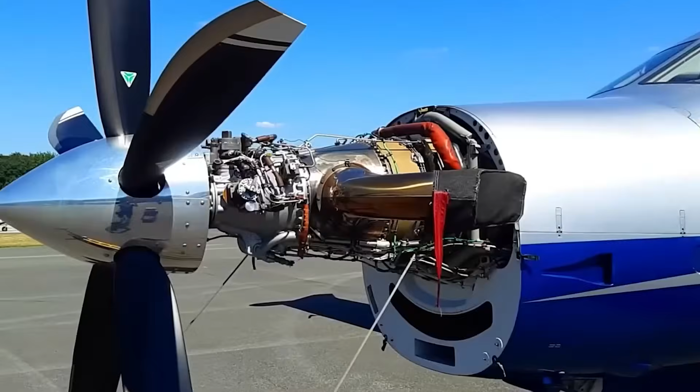Below you, piston-powered aircraft labor at lower altitudes, their engines hammering away with mechanical brutality, pistons slamming up and down hundreds of times per minute. This isn't science fiction, it's the promise that turboprop technology has tantalized us with for decades, and recent breakthroughs suggest it might finally become accessible to general aviation.

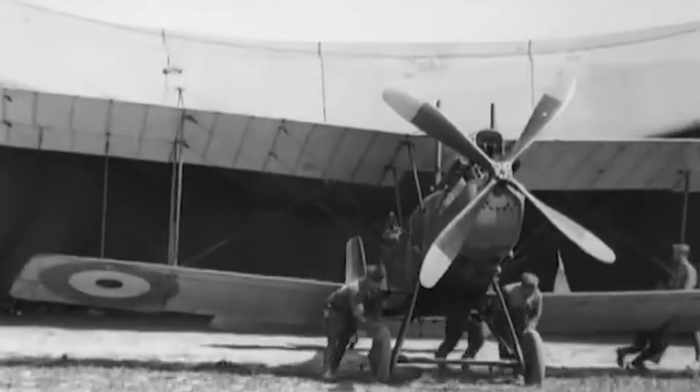The revolution at 20,000 feet. For over a century, piston engines have dominated light aircraft like an unshakable institution. They've powered everything from Cessna trainers to warbird legends, their familiar rhythm becoming synonymous with flight itself. But that dominance faces its first real challenge.

In specialized applications worldwide, a new sound is emerging. The turbine's whistle, once reserved for jets and airliners, now spinning propellers on smaller aircraft, with breakthrough technologies promising to solve the efficiency problems that have kept them from mainstream adoption.

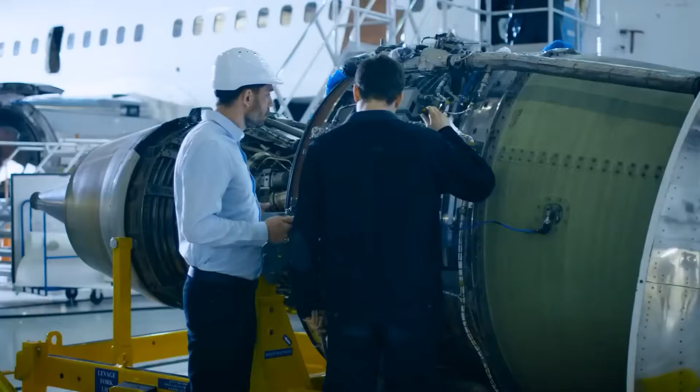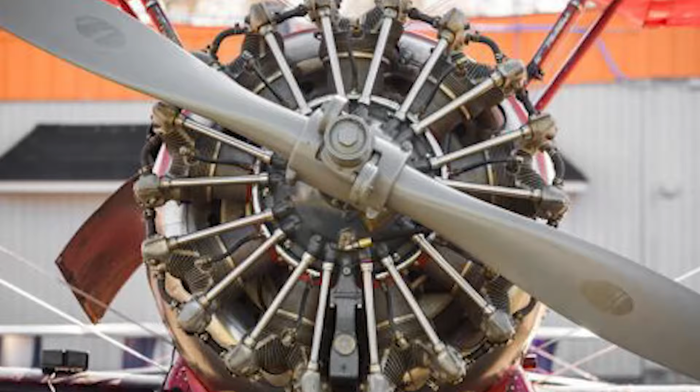The reliability numbers tell a compelling story. The Pratt & Whitney PT6A turboprop achieves time between overhauls of 3,600 hours standard, extending to 6,000 hours on some variants, compared to the typical 2,000 hours for piston engines. These turboprops routinely operate for thousands of hours with minimal unscheduled maintenance. Meanwhile, piston engine owners face regular cylinder work, magneto replacements, and exhaust repairs as routine operating expenses.

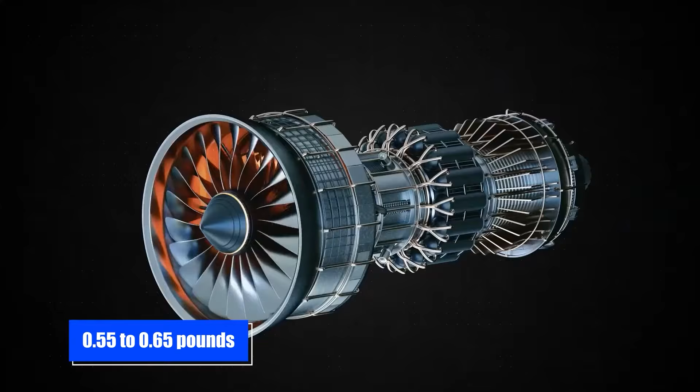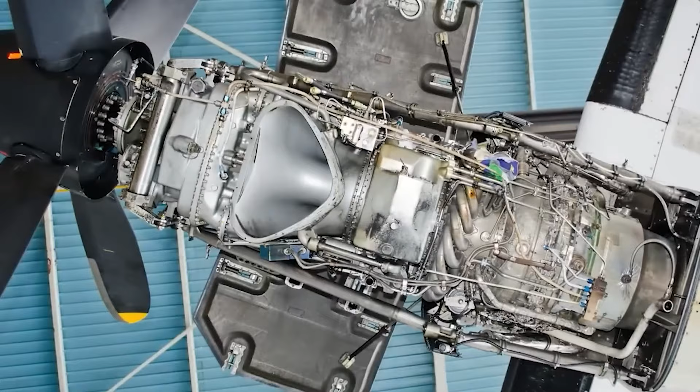But here's the catch that's kept turboprops from conquering general aviation: fuel consumption. Traditional small turboprops burn 0.55 to 0.65 pounds of fuel per horsepower hour, while modern piston engines achieve 0.42 to 0.45, with some diesel variants reaching an impressive 0.36. This efficiency gap has been the fortress wall protecting piston dominance.

Until now. The empire under pressure. For 8 decades, Lycoming and Continental ruled general aviation with engines that traced their lineage to the 1930s. These horizontally opposed power plants became the backbone of civilian flying, reliable enough, powerful enough, and most importantly, affordable enough for average pilots. The O-320, O-360, and O-540 series engines powered millions of flight hours, their designs refined but fundamentally unchanged since Eisenhower was president.

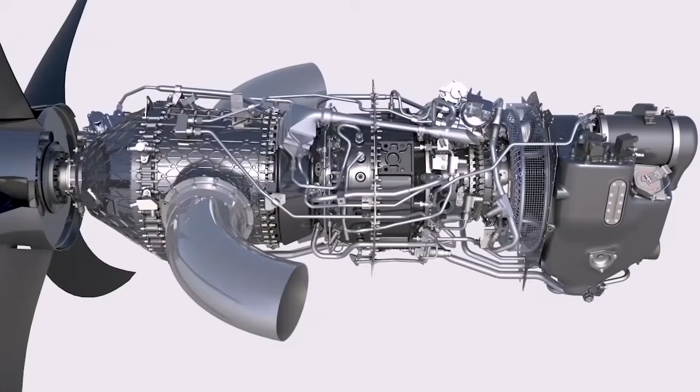The first cracks in this empire appeared with environmental concerns over leaded aviation gasoline. While cars abandoned lead in the 1970s, aircraft engines clung to 100LL low-lead avgas, still containing 2.12 grams of lead per gallon. Environmental agencies worldwide began pressing for alternatives, but the installed base of engines requiring high-octane leaded fuel seemed immovable.

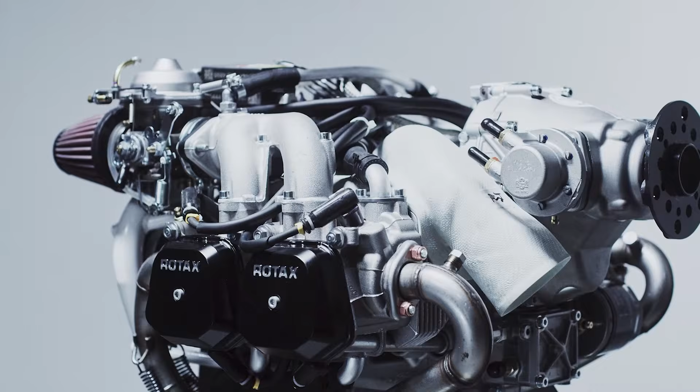Then Rotax arrived. From Austria with a different philosophy, their 912 series engines, derived from motorcycle technology, brought liquid cooling, gear reduction, and electronic ignition to aircraft. Burning regular automotive gasoline, these engines achieved better fuel economy than traditional aircraft engines while weighing significantly less. Suddenly, the old guard faced competition from outside their comfortable ecosystem.

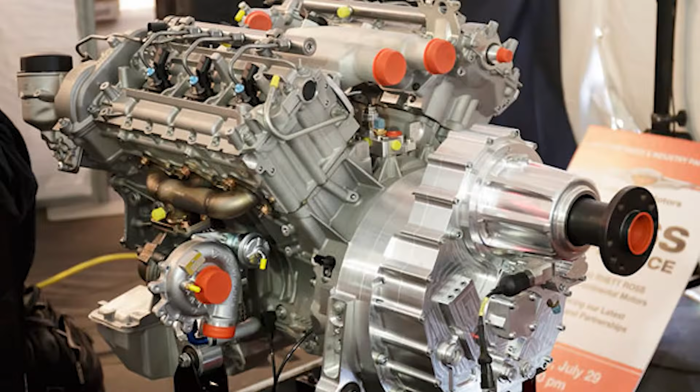The real disruption came from diesel technology. Continental's CD-100 series engines, based on Mercedes-Benz automotive designs, burn Jet A fuel while achieving specific fuel consumption around 0.36 pounds per horsepower hour, nearly 20% better than traditional avgas engines. Diamond Aircraft built entire model lines around these engines, proving that piston technology could evolve when pressed.

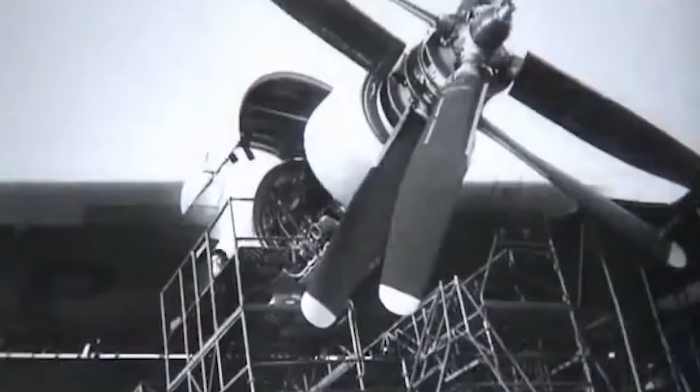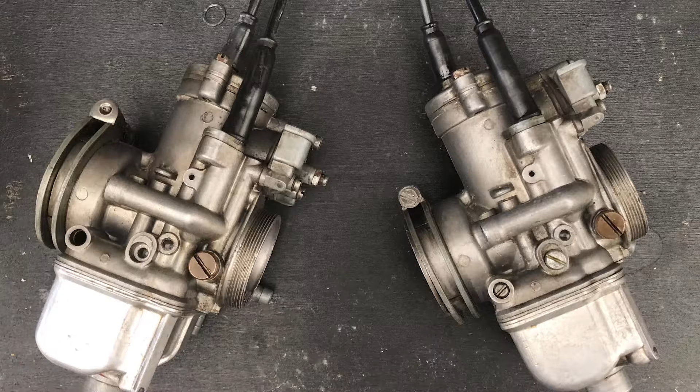Why small turbines struggled. Engineers have dreamed of scaling turbine technology down to light aircraft since the 1950s. The appeal was undeniable. Eliminate the reciprocating masses, the complex valve trains, the temperamental carburetors. Replace them with smooth rotation, simple architecture, and proven reliability. The physics, however, proved cruel to small turbines.

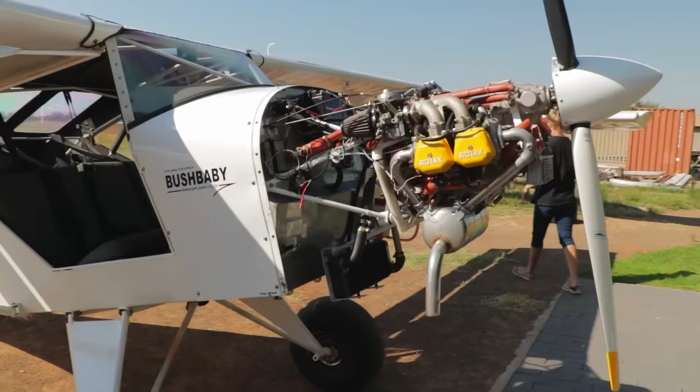As components shrink, the clearance between rotating blades and stationary housings remains nearly constant, meaning proportionally more compressed air escapes uselessly. A large turbine might lose 1% of compressed air to tip leakage. A small turbine might lose 5%. This geometric reality alone creates a massive efficiency penalty.

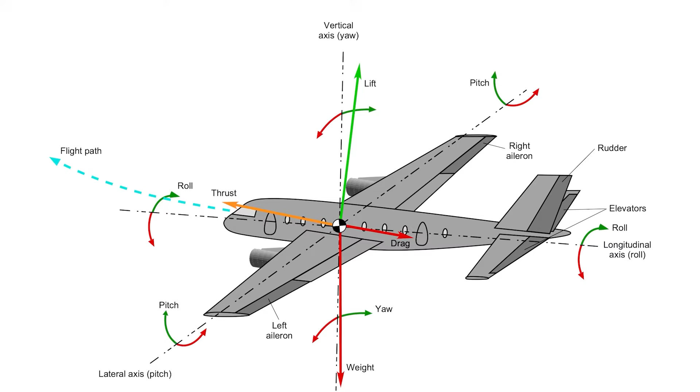The Reynolds number problem compounds the challenge. This dimensionless value describes the relationship between inertial and viscous forces in fluid flow. Smaller blades operate at lower Reynolds numbers, meaning the air behaves more like honey than water, dragging, swirling, creating losses at every turn. The same blade design that works brilliantly at airline scale becomes aerodynamically compromised at general aviation scale.

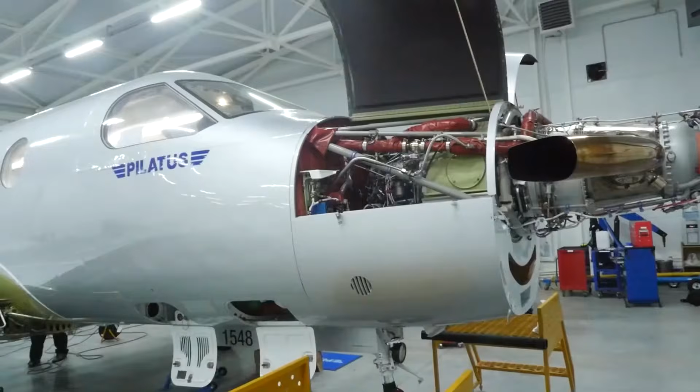Combustion efficiency suffers equally at small scale. Large turbines maintain stable combustion across wide operating ranges. Small combustors struggle with flame stability, especially at the partial power settings typical of cruise flight. While a piston engine might actually improve efficiency at reduced power, turboprops see dramatic specific fuel consumption increases when throttled back. For decades, these physics seemed insurmountable.

The Allison 250, now Rolls-Royce M250, found success in helicopters and specialized applications, but its fuel consumption made it impractical for most fixed-wing uses. The engine burned roughly 0.60 pounds per horsepower hour, 50% more than comparable piston engines.

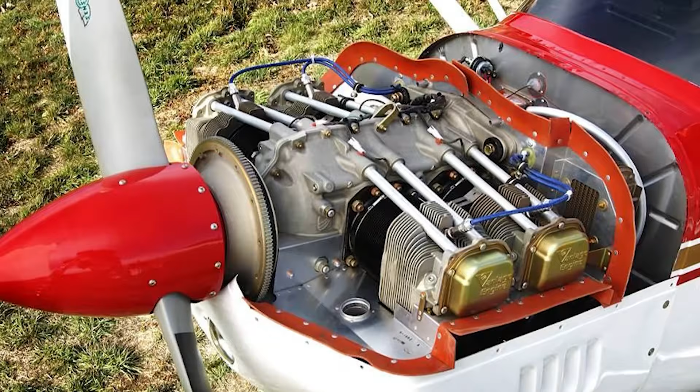The game-changing innovation. In a facility outside Paris, Turbotech achieved something the industry considered impossible: a small turboprop with near-piston fuel efficiency. Their TP-R90 engine claims specific fuel consumption of 0.45 pounds per horsepower hour, within striking distance of traditional aircraft engines, and better than many older designs.

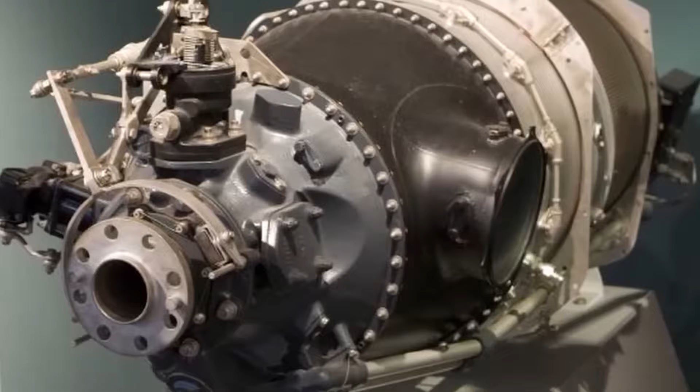The secret is recuperation, capturing waste heat from exhaust gases to preheat compressed air before combustion. Industrial gas turbines have used this technique since the 1960s, but aviation applications seemed impossible due to weight and complexity constraints.

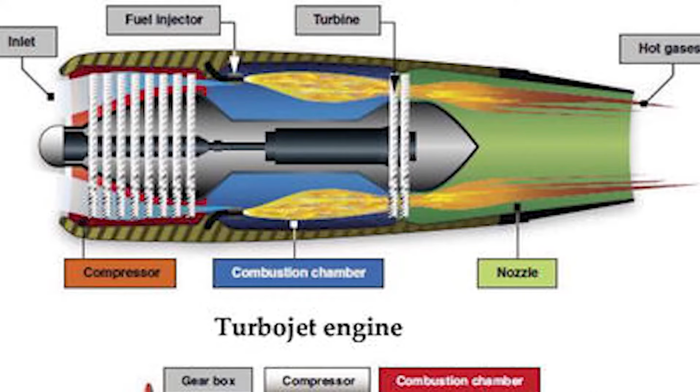A recuperator is essentially a heat exchanger operating in one of the most hostile environments imaginable: extreme temperatures, vibration, and the absolute necessity of reliability. Modern materials made the breakthrough possible. Inconel alloys, developed for aerospace applications, withstand the thermal cycling that would destroy conventional metals.

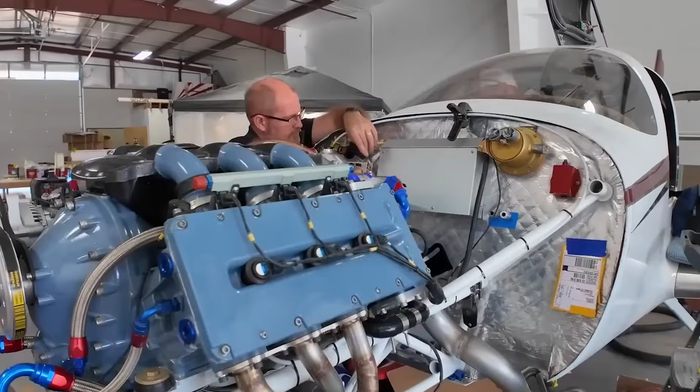Additive manufacturing enables geometries that maximize surface area while minimizing weight, folded passages that would be impossible to machine conventionally. Computer modeling optimizes every passage for maximum heat transfer with minimum pressure drop. The TP-R90 produces 130 horsepower from a package weighing just 78 kilograms, comparable to piston engines of similar power.

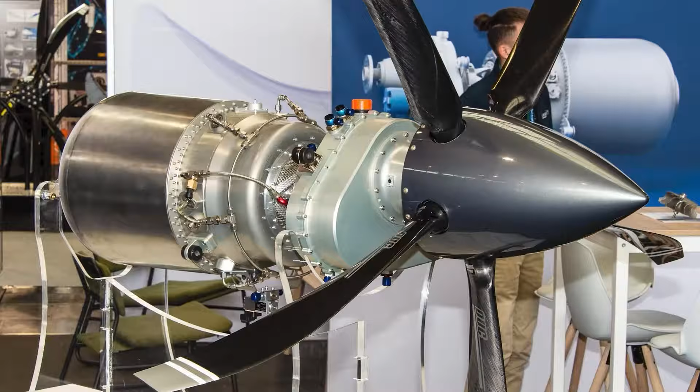It runs on Jet A, diesel, or even biofuels. Test pilots report turbine smoothness with fuel flows approaching their previous piston-powered aircraft. But this efficiency comes at a price, literally. Early estimates suggest the TP-R90 will cost approximately $100,000, roughly double a comparable piston engine. The hard mathematics of ownership.

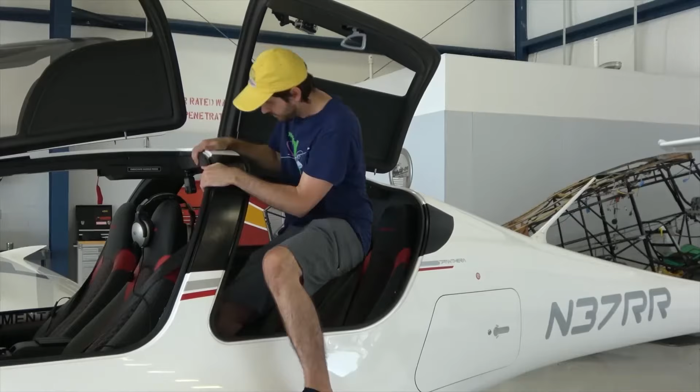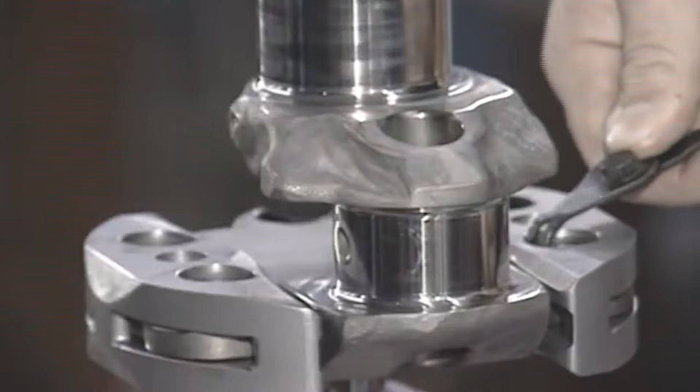Aircraft ownership economics extend far beyond purchase price. A typical Continental IO-360 costs around $45,000 new and requires overhaul at 2,000 hours for another $35,000. Between overhauls, expect cylinder work, magneto replacements, and exhaust repairs totaling $10,000 or more. That's $90,000 over 2,000 hours, $45 per flight hour just for the engine.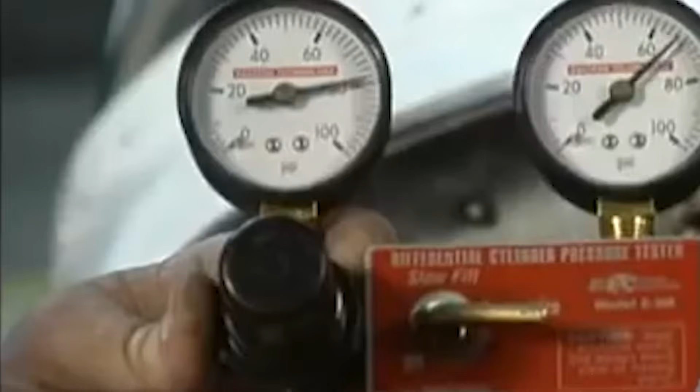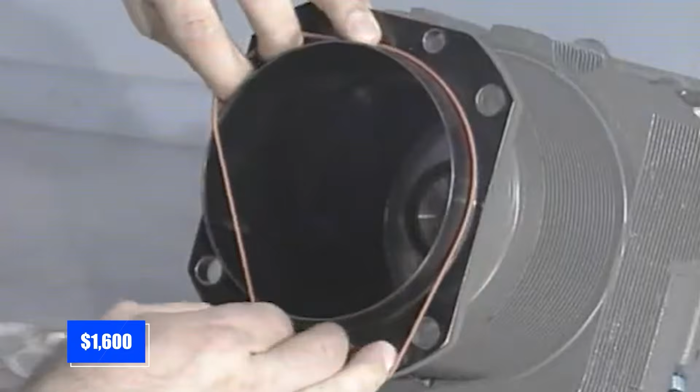But let's examine the hidden costs that make piston ownership even more expensive. Annual inspections on piston engines average $3,500, with compression checks, oil analysis, and borescope inspections adding another $1,200 yearly. Magneto 500-hour inspections run $800 each. That's $1,600 every 500 hours for the pair.

Spark plugs need replacement every 400 hours at $50 each, $600 for a 6-cylinder engine. Oil changes every 50 hours cost $200, including filter and analysis. Over 2,000 hours, these minor expenses add another $18,000 to your operating costs. Small turboprops promise different mathematics. While purchase prices currently run double or more than piston equivalents, the maintenance savings are dramatic.

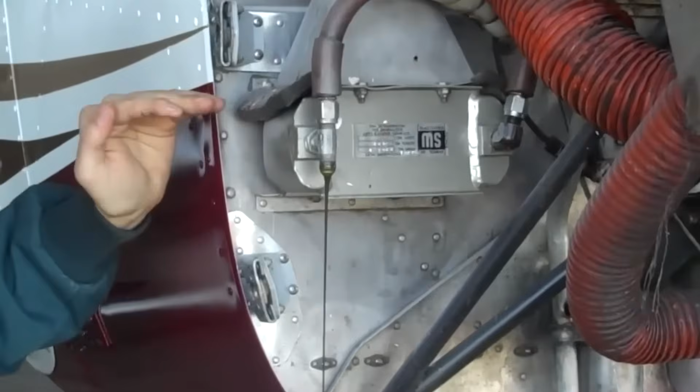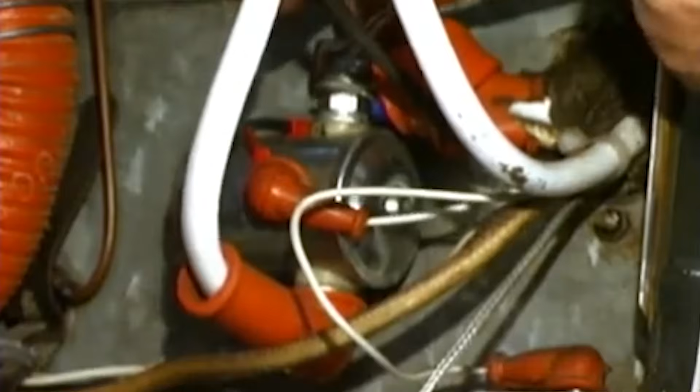Hot section inspections replace cylinder work. Electronic controls eliminate magneto problems. Single lever power management removes the possibility of detonation or shock cooling damage. Consider real-world operator data from a Canadian charter company that replaced their Continental-powered Cessna 206 with a Soloy turbine conversion.

Their piston engine was costing $89 per flight hour in maintenance and reserves. The turbine conversion, despite its $400,000 price tag, reduced that to $52 per hour. At 500 hours annually, they save $18,500 per year. The higher acquisition cost pays for itself through reliability. Their dispatch rate improved from 87% to 96%, meaning more revenue flights and fewer stranded passengers.

The altitude advantage multiplies these benefits. Turboprops maintain power as they climb, reaching their best efficiency at altitudes where piston engines struggle. At 18,000 feet, a turboprop might achieve its optimal fuel consumption while flying above most weather. A normally aspirated piston engine has lost 40% of its power and burns fuel inefficiently in the thin air.

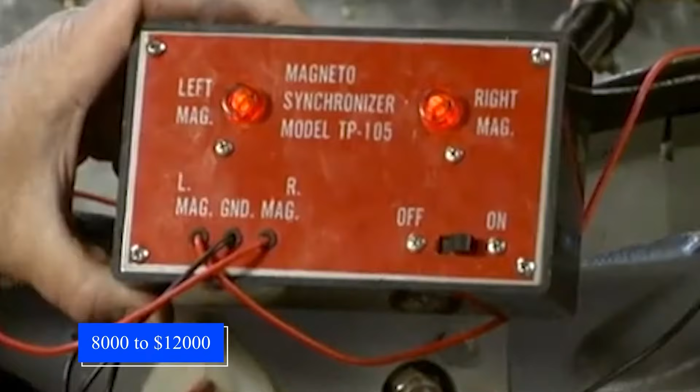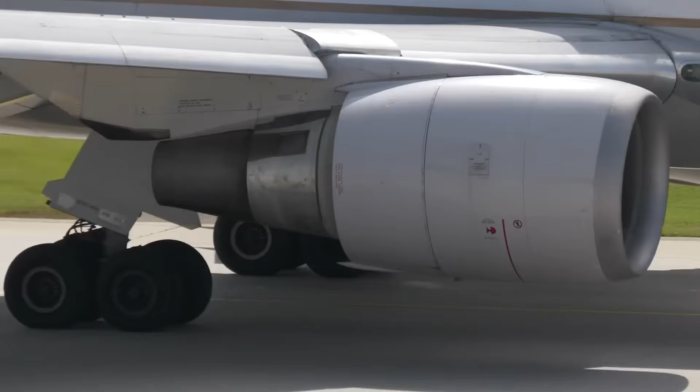Turbocharged piston engines can maintain power, but add another layer of complexity and failure modes. Turbocharger replacements run $8,000 to $12,000 and often fail before TBO. Insurance companies recognize the reliability difference. Turbine-powered aircraft often qualify for premium reductions of 15 to 25% compared to piston equivalents. For commercial operators, this alone can justify the higher acquisition cost.

A flight school operating a turbine-powered trainer reports annual insurance savings of $12,000 per aircraft compared to their previous piston fleet. The ability to dispatch reliably, especially in challenging conditions, translates directly to revenue. Weather cancellations drop by 30% when operators can climb above ice and turbulence, capabilities that piston aircraft struggle to match even with turbocharging. Two paths forward.

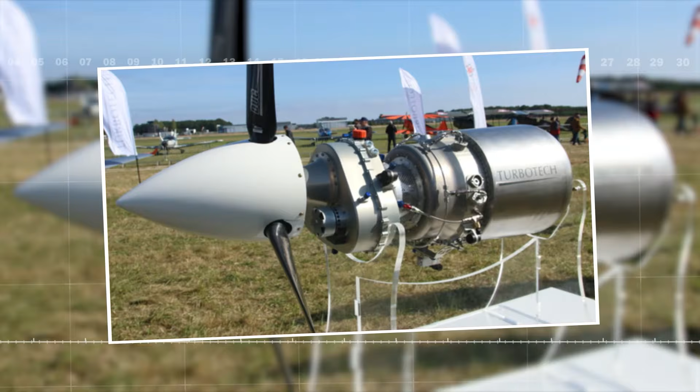The current market offers two distinct approaches to small turboprops, each with fundamental trade-offs. High-efficiency designs like Turbotech's recuperated engines achieve near-piston fuel consumption, but at premium prices and unproven long-term reliability. The recuperator adds complexity to what should be a simple engine, potentially negating the reliability advantage that makes turboprops attractive.

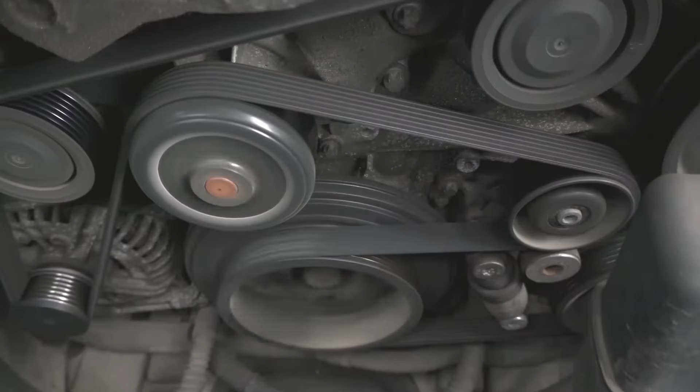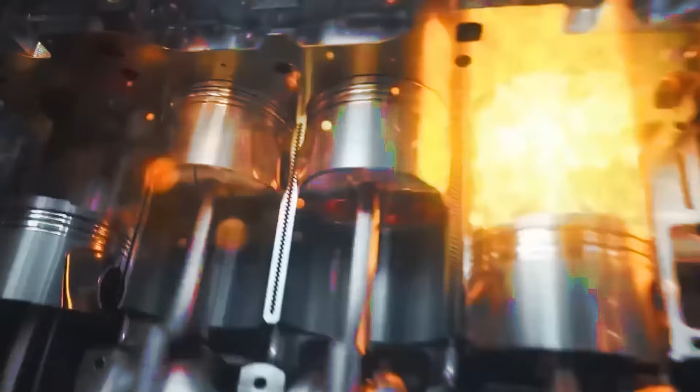The TPR-90's recuperator operates on a fascinating principle of thermodynamic recovery. The exhaust gas temperature leaving the turbine section reaches 650 degrees Celsius, energy that traditional turboprops waste entirely. The recuperator captures approximately 30% of this thermal energy, raising the compressed air temperature from 200 degrees Celsius to nearly 400 degrees Celsius before it enters the combustion chamber. This preheating means the engine needs 25% less fuel to achieve the same turbine inlet temperature.

But this efficiency comes with engineering challenges. The heat exchanger must withstand thermal cycling from minus 40 degrees Celsius cold starts to 650 degrees Celsius operating temperatures thousands of times without cracking, warping, or fouling.

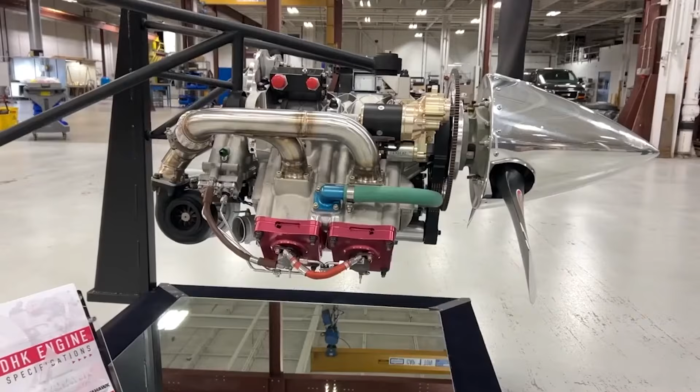The alternative path, pursued by companies like TurbAero and PBS Velká Bíteš, accepts higher fuel consumption in exchange for simplicity and lower cost. Their engines achieve 0.55 to 0.60 pounds per horsepower hour, about 30% worse than modern pistons, but with traditional turbine reliability and more accessible pricing around $60,000 to $70,000.

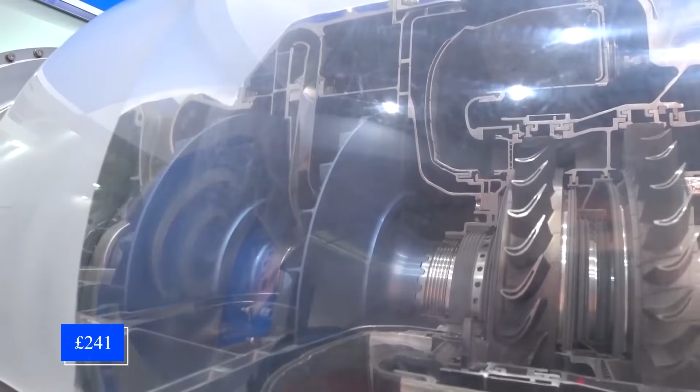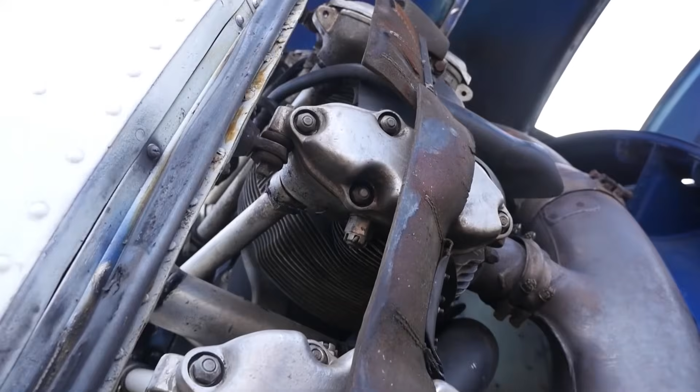The company has delivered over 1,000 units primarily to UAV manufacturers, accumulating millions of flight hours that prove the fundamental reliability. Their latest variant, the TP100S, adds a second-stage turbine that improves efficiency by 8% while adding only 15 pounds, still not matching piston efficiency, but closing the gap. This bifurcation creates distinct market segments.

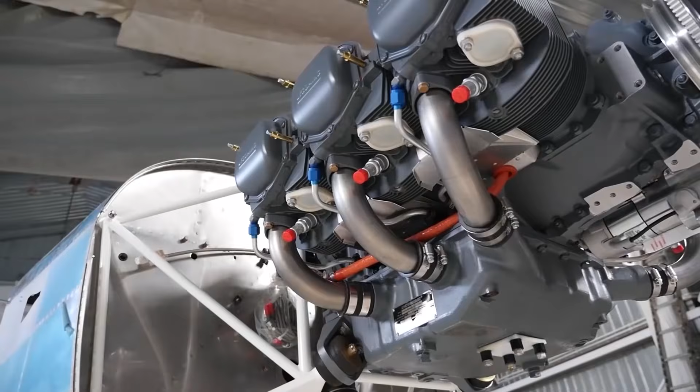Operators flying many hours annually might justify recuperated engines through fuel savings. Those flying less frequently might prefer simpler designs with higher fuel consumption but lower capital costs. Neither approach yet matches the overall economics of established piston engines for typical private owners flying 50 to 100 hours annually. The wildcard is ongoing development in ceramic materials and advanced manufacturing.

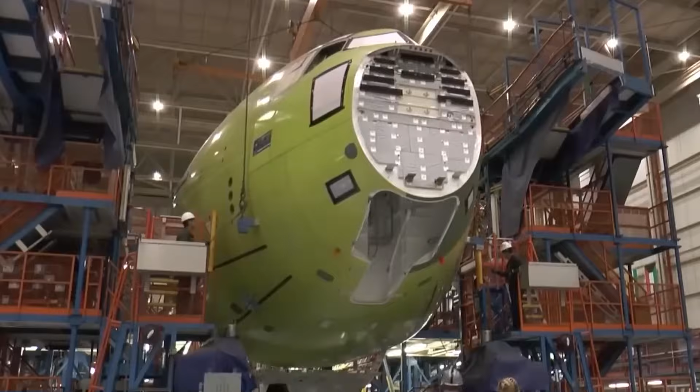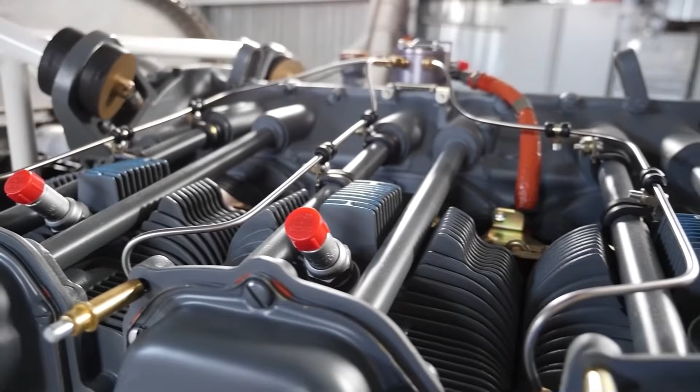NASA's Small Business Innovation Research Program recently funded 3 companies developing ceramic matrix composite recuperators that could operate at 750 degrees Celsius while weighing 40% less than metal equivalents. If these materials prove durable, recuperated engines could achieve 0.40 pounds per horsepower hour, better than most piston engines, while maintaining the weight advantages that make turboprops attractive for aircraft applications.

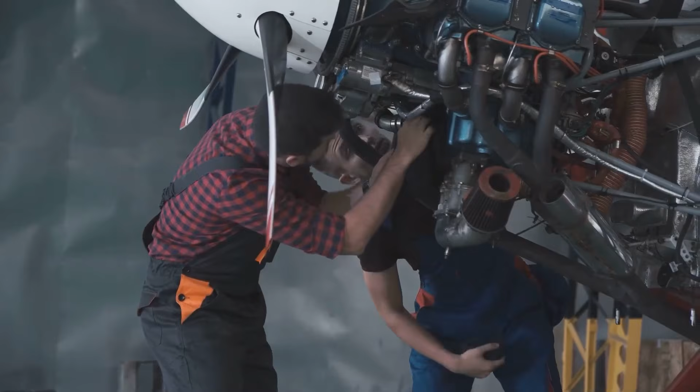The market response: traditional engine manufacturers aren't standing still. Lycoming has partnered with Cobra Aero to develop small turboprops for the unmanned aerial vehicle market, a testing ground for technologies that might migrate to manned aircraft. Continental, through its parent company AVIC, has access to Chinese turbine development that could yield surprising advances. But the most interesting developments come from outside traditional aviation.

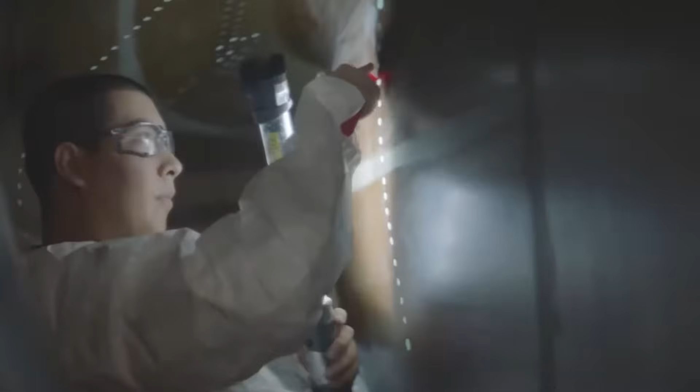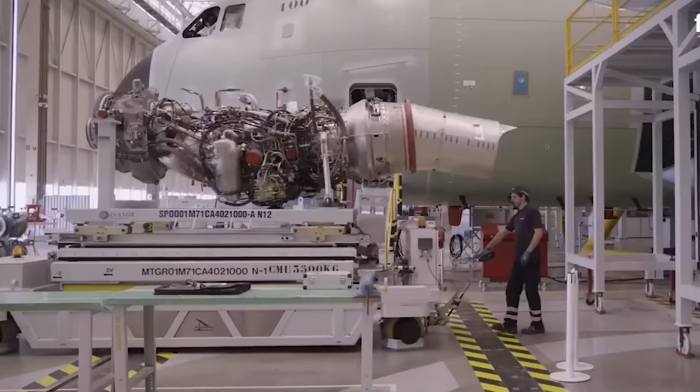Automotive suppliers, experienced with turbochargers and high-temperature materials from diesel development, see opportunities in aircraft propulsion. Electric vehicle companies view small turboprops as ideal range extenders for hybrid aircraft. A turbine running at constant, optimal speed charging batteries combines the energy density of liquid fuel with the efficiency and simplicity of electric propulsion. Several hybrid projects are already flying.

A modified Pipistrel Panthera uses a small turbo generator to extend the range of its electric propulsion system. The combination delivers near-silent takeoffs from noise-sensitive airports, then efficient cruise powered by the turbine. It's a glimpse of how turboprops might enter general aviation, not as direct replacements for piston engines, but as components in hybrid systems that leverage the best of multiple technologies.

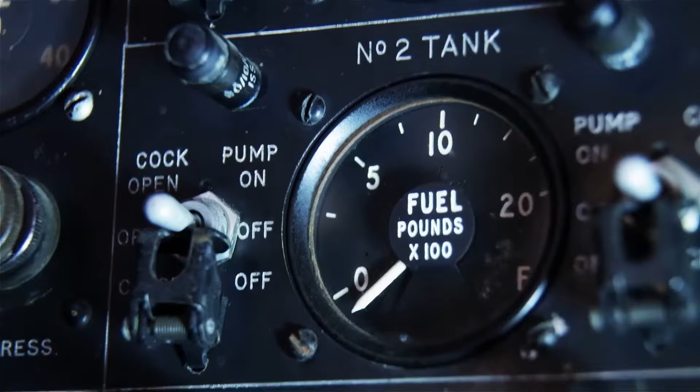Flight training organizations watch these developments carefully. The reduced pilot workload of turboprops, single-lever power control, no mixture management, no shock cooling concerns, could improve safety while reducing training complexity, but the higher operating costs remain a barrier. Until turboprops achieve true fuel consumption parity with piston engines, most schools will stick with traditional power plants.

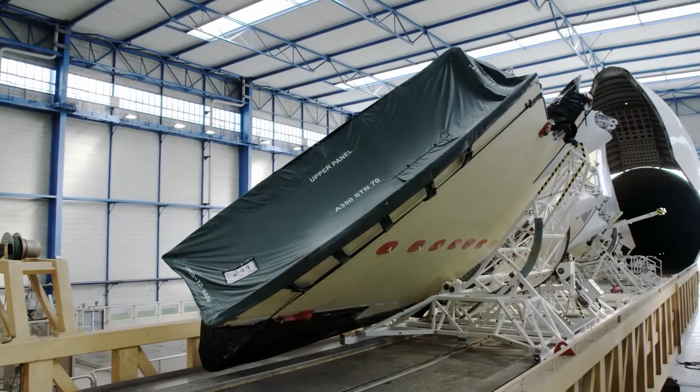Manufacturing revolution. The transformation in turboprop viability stems largely from manufacturing advances that seemed impossible a decade ago. Metal 3D printing enables internal cooling channels following optimal thermodynamic paths rather than manufacturing convenience. Components that once required dozens of parts brazed together now emerge as single pieces from powder bed fusion machines. This changes everything about engine development.

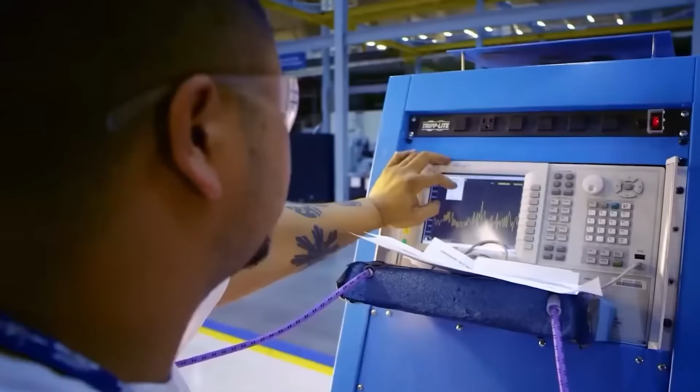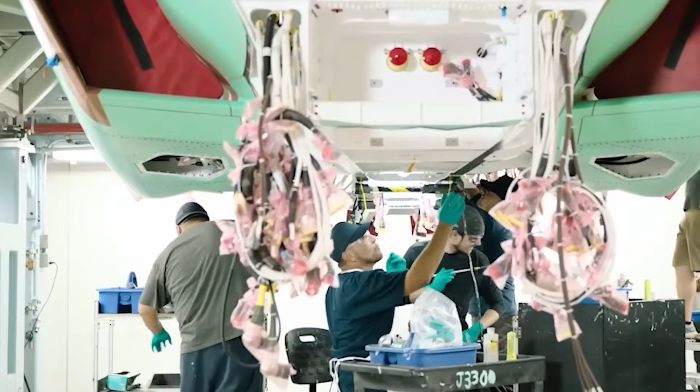Prototypes that once took months to machine can be printed in days. Design iterations happen at software speed rather than tooling speed. Small companies can develop engines without massive capital investments in production facilities. The democratization of turbine manufacturing breaks the monopoly of established aerospace companies.

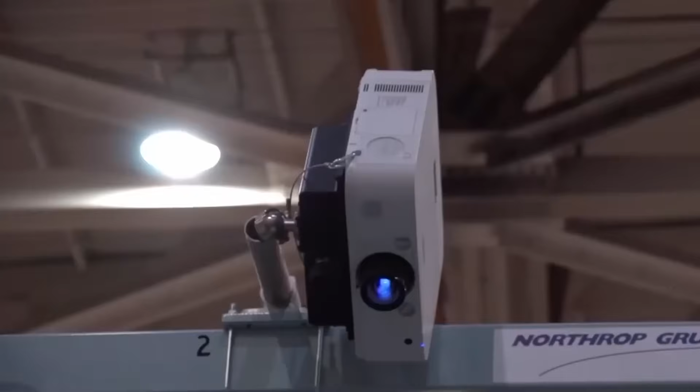Electronic controls represent an equally dramatic advance. Modern full-authority digital engine control (FADEC) systems, derived from automotive applications, cost thousands rather than tens of thousands of dollars. They manage start sequences that once required careful pilot attention, prevent destructive overtemperature conditions, and optimize performance across all flight conditions. The pilot becomes a power requester rather than an engine manager.

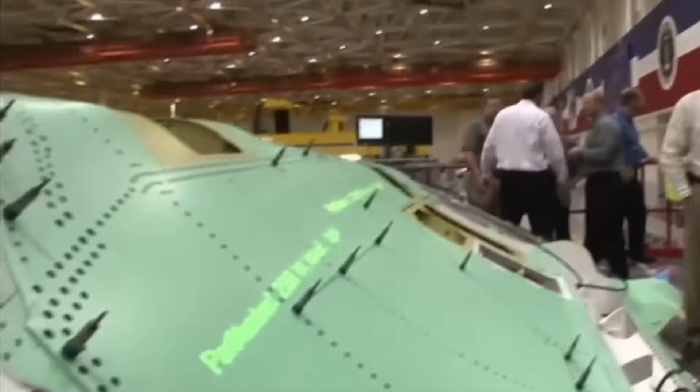These computers are getting smarter. Machine learning algorithms analyze fleet-wide operational data to predict maintenance needs before failures occur. Software updates improve engine performance without touching hardware. One manufacturer recently increased power output by 3% through nothing more than optimized fuel mapping, impossible with mechanical fuel controls.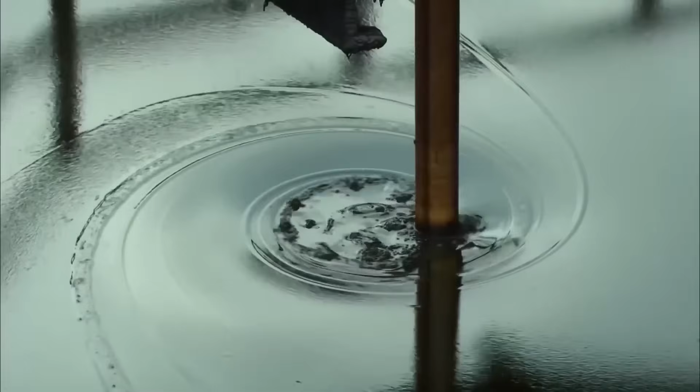Environmental and regulatory catalysts. The environmental case for turboprops grows stronger as regulations tighten. While they currently burn more fuel per horsepower than the best piston engines, turboprops run on unleaded Jet A available worldwide. The lead emissions from avgas affect communities around airports, creating political pressure for alternatives. The numbers are sobering. General aviation burns approximately 180 million gallons of 100LL annually in the United States alone, releasing 380 tons of lead into the atmosphere.

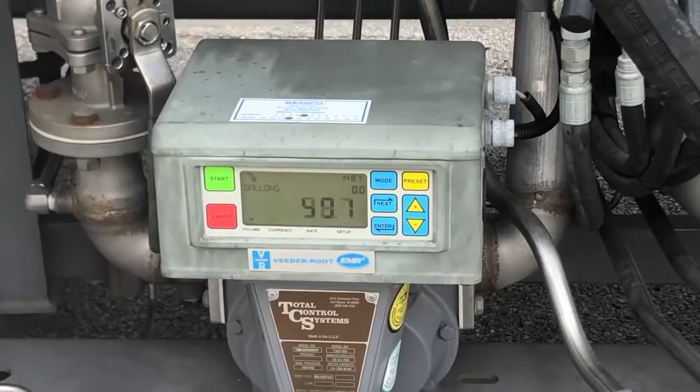A 2021 EPA study found elevated blood lead levels in children living within 1 kilometer of airports with significant piston aircraft traffic. Reid-Hillview Airport in San Jose, California, became the flashpoint when Santa Clara County banned the sale of leaded fuel starting January 2022, effectively grounding many aircraft. The FAA intervened, but the message was clear: communities won't tolerate lead emissions indefinitely.

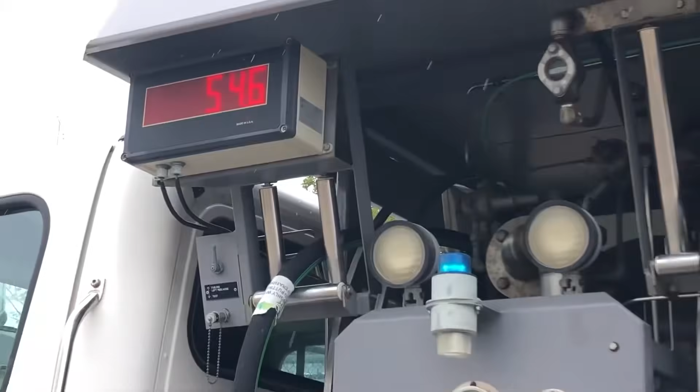Europe leads this charge. Several countries have announced plans to ban leaded avgas by 2030. While unleaded alternatives like G100UL are emerging, they cost significantly more than traditional 100LL. Jet A remains cheaper and more widely available than any aviation gasoline. For turboprops, the fuel infrastructure already exists at every airport serving commercial traffic.

Switzerland's Federal Office of Civil Aviation has mandated a 50% reduction in lead emissions by 2030 and complete elimination by 2035. France follows with similar targets, offering tax incentives for operators converting to unleaded propulsion, whether electric, diesel, or turbine. The European Aviation Safety Agency has fast-track certification for unleaded fuel alternatives, but also streamlined supplemental type certificates for turboprop conversions, recognizing that fuel switching might be easier than fuel replacement.

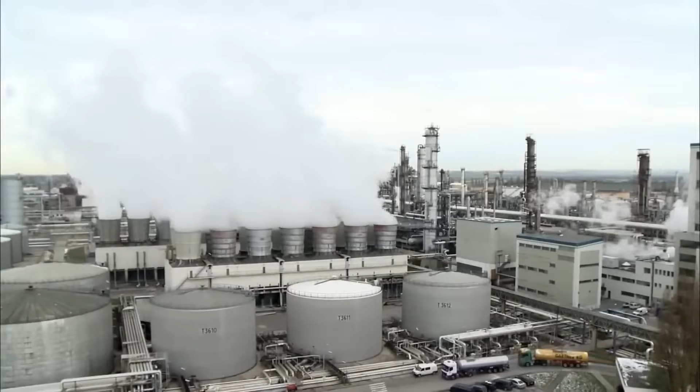The carbon equation remains complex. A recuperated turboprop burning 10% more fuel than a modern diesel piston engine produces 10% more CO2. But if that turboprop enables reliable operation that keeps aircraft flying rather than sitting for maintenance, the per-mile emissions might actually decrease. The full life cycle analysis, including manufacturing and maintenance, hasn't been definitively calculated.

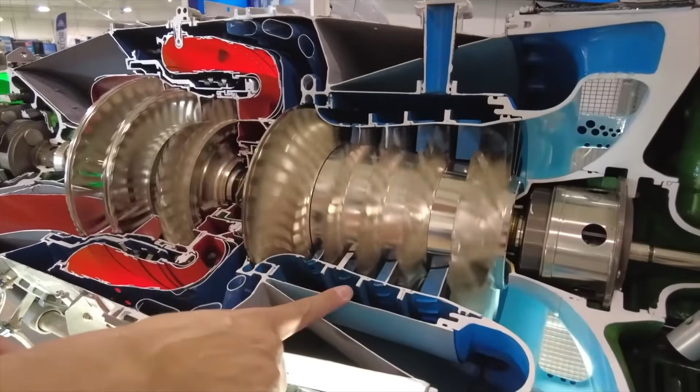Sustainable aviation fuel (SAF) compatibility gives turboprops another environmental advantage. While piston engines require specific octane ratings and careful fuel chemistry, turbines run on almost anything combustible. Current SAF blends reduce life cycle emissions by up to 80% compared to petroleum Jet A. Several turboprop manufacturers have certified their engines for 100% SAF operation, something piston engines cannot achieve without significant modifications. United Airlines' commitment to purchasing 3.4 billion gallons of SAF will create supply chains that general aviation turboprops can leverage.

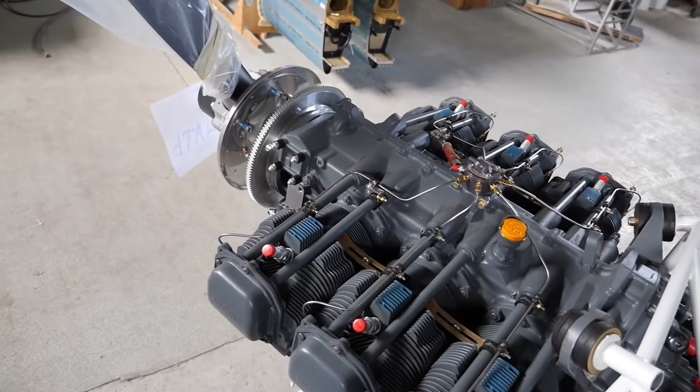Noise regulations increasingly favor turbines. The high-frequency whine of a turboprop, while distinctive, carries less distance than the low-frequency rumble of large displacement piston engines. Turboprops also eliminate the sharp impulse noise of exhaust valves opening, reducing community impact around airports.

The transition timeline: history suggests aviation engine transitions take decades, not years. Radial engines dominated into the 1950s despite horizontally opposed engines offering clear advantages. The inertia comes from multiple sources: existing fleet investment, mechanic training, parts infrastructure, and simple habit. Consider the numbers. Approximately 200,000 piston-powered general aviation aircraft operate worldwide, representing $40 billion in asset value. These aircraft have established maintenance networks, trained technicians, and proven operating procedures.

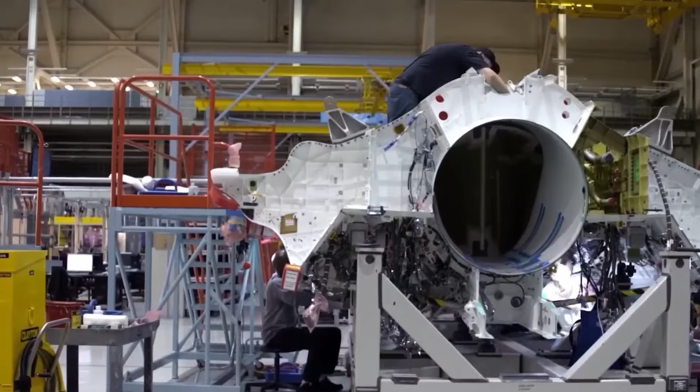The average general aviation aircraft is 40 years old. Many will fly another 40 years with proper maintenance. This installed base creates massive inertia against rapid change. Even if turboprop production started dominating tomorrow, the piston fleet would take decades to age out naturally. But modern transitions might happen faster. Information spreads instantly. Global supply chains can pivot quickly. Regulatory pressure provides deadlines that didn't exist in previous eras. If recuperated turboprops achieve their efficiency promises while maintaining reliability, the transition could accelerate dramatically.

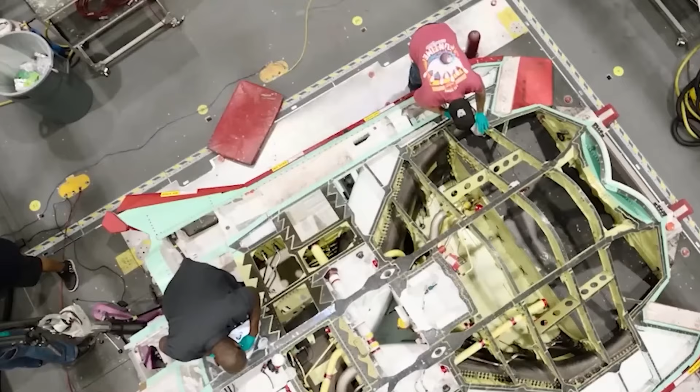The unmanned aerial vehicle market provides a preview. Military and commercial drone operators rapidly adopted small turboprops despite efficiency penalties because reliability mattered more than fuel consumption for their missions. As these operators accumulate millions of flight hours, they're proving the technology at scales that general aviation couldn't achieve alone. General Atomics MQ-9 Reaper drones have logged over 7 million flight hours on their TPE-331 turboprops, more than many general aviation engine models accumulate in decades. This operational data flows directly into civilian certification efforts, de-risking the technology for aviation authorities.

Historical precedent exists for rapid transitions when external factors align. The 1973 oil crisis drove a swift shift from large displacement engines to smaller, efficient designs in automobiles, a change that seemed impossible just years earlier. Aviation faced similar pressure but lacked alternatives. Now, with multiple turboprop options emerging simultaneously with environmental regulations, the conditions for rapid change are aligning.

By 2035, industry analysts project 30% of new light aircraft deliveries will feature turboprop power. By 2045, that could reach 70%. These projections assume continued improvement in efficiency and reduction in cost, not guaranteed, but supported by current development trajectories. Frost & Sullivan's aerospace division predicts the tipping point will occur when turboprops achieve 0.42 pounds per horsepower hour at a price point within 50% of comparable piston engines. Based on current development rates, they project this convergence between 2032 and 2035.

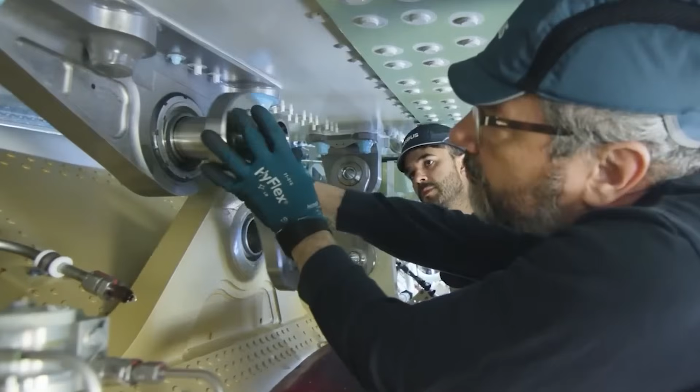What this means for aviation's future. The turboprop revolution represents more than just different engines. It's a fundamental shift in how we think about aircraft propulsion. The simplicity and reliability enable new operating models. Aircraft could fly more hours annually with less downtime. Pilots could focus more on mission and less on engine management. Maintenance could become predictive rather than reactive.

For manufacturers, the imperative is clear. Develop turboprop options or risk obsolescence. Textron, parent of Cessna and Beechcraft, has already announced turboprop development programs for their future aircraft. Piper, traditionally conservative, is exploring partnerships with engine manufacturers. The company that delivers an affordable, efficient four-seat turboprop will define the next generation of general aviation.

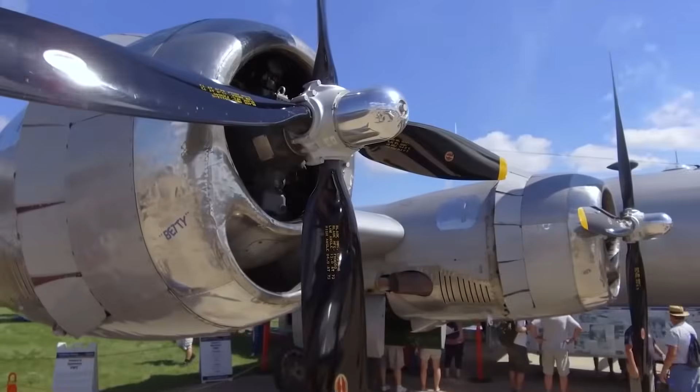For pilots and owners, the transition offers both opportunity and challenge. Early adopters of recuperated turboprops might pay premium prices, but gain competitive advantages in reliability and capability. Late adopters might get better technology at lower prices, but miss years of benefits. The choice depends on individual mission profiles, risk tolerance, and financial capacity.

The parallel development of electric and hybrid propulsion adds complexity to these decisions. Should you invest in transitional turboprop technology or wait for electric aircraft that might be a decade away? The answer likely depends on your timeline. Turboprops are flying today. Electric aircraft, with practical range, remain largely experimental.

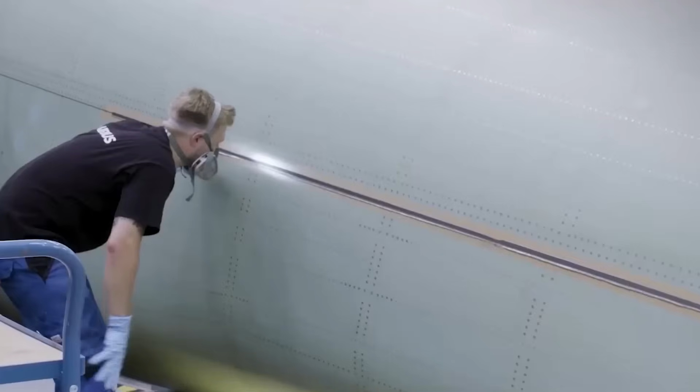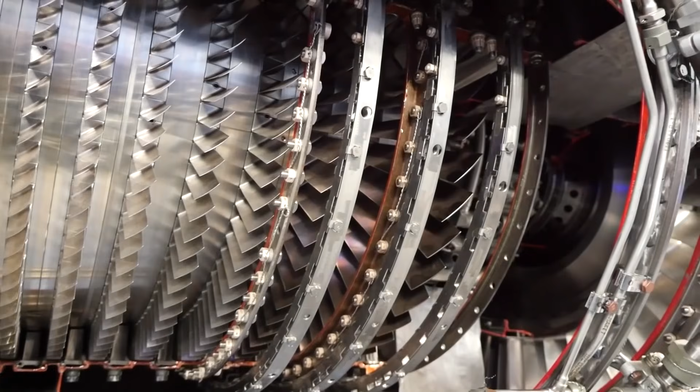What if breakthrough technologies suddenly made small turboprops as efficient as diesels? What if manufacturing advances dropped prices to parity with piston engines? The transition would accelerate from evolution to revolution. Every flight school would switch within an upgrade cycle. New aircraft would universally adopt turbine power. The piston engine industry would contract to a specialty market serving vintage aircraft.

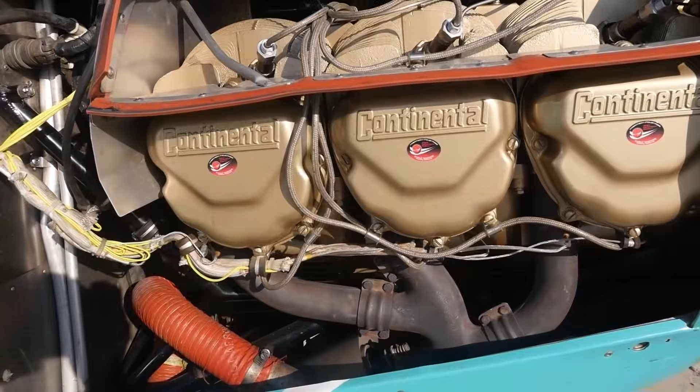This isn't fantasy. Similar transitions have happened in other industries when technology reached inflection points. Digital cameras destroyed film almost overnight, once quality and cost reached critical thresholds. Smartphones eliminated dozens of separate devices once capability and convenience aligned. Aviation might be approaching its own inflection point. The question isn't whether turboprops will eventually power most light aircraft. It's whether current breakthrough technologies will make that transition happen in 1 decade or 3.

For those paying attention, the signs are clear. The age of reciprocating aircraft engines, after a century of dominance, is drawing to a close. The turbine era for light aircraft isn't coming. It's beginning right now.